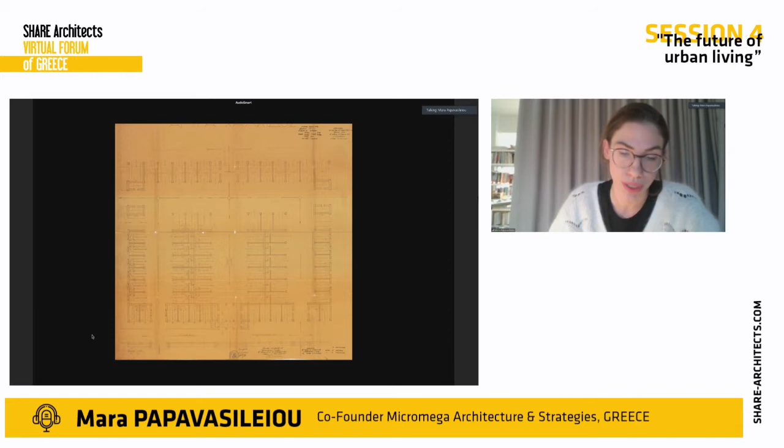But the needs for space grew, so after a large immigration movement towards Greece, there was an architectural competition in the 1930s for the extension of the market. The architects Kidoniatis and Vagianos were awarded the first prize. Their proposal was innovative for the time, following the aesthetics of their era: an extension of the market built in concrete, faithful to the mid-war modern spirit, the Bauhaus spirit, which also incorporated some Art Deco elements. The surrounding cantilevers are 3 meters wide, which was a technical innovation of that time.

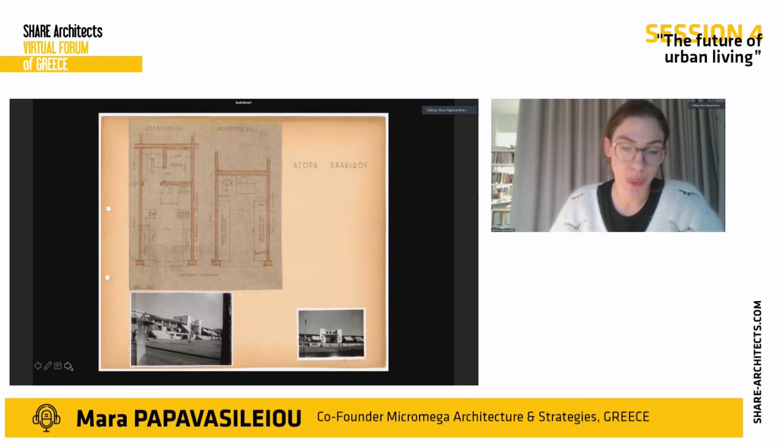The municipal market was the heart of the city and the social life of Chalkida until the 90s, when the buildings started to get abandoned. These are pictures from the 70s, and these are recent pictures.

Hopefully, in 2015, the building is declared a monument by the state, so an architectural competition is announced later that year to save the monument. Our team wins the first prize in this competition.

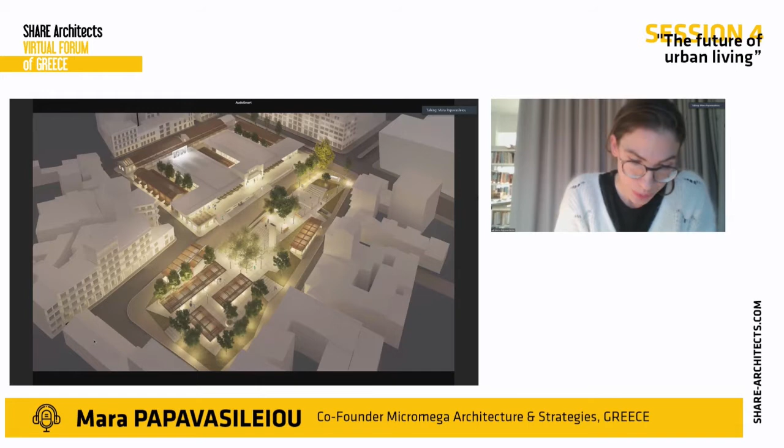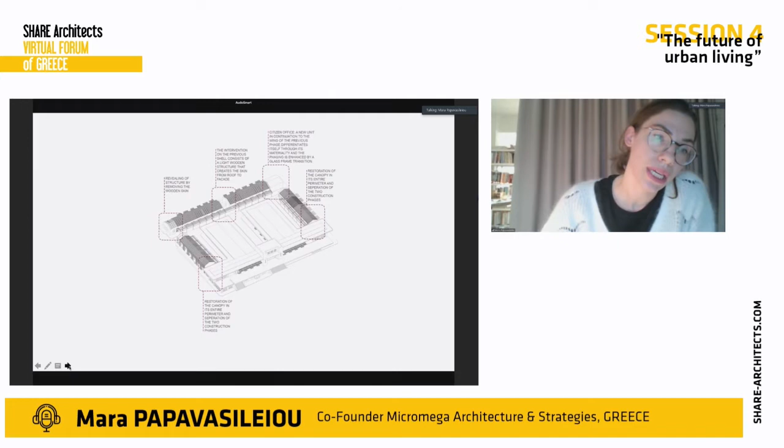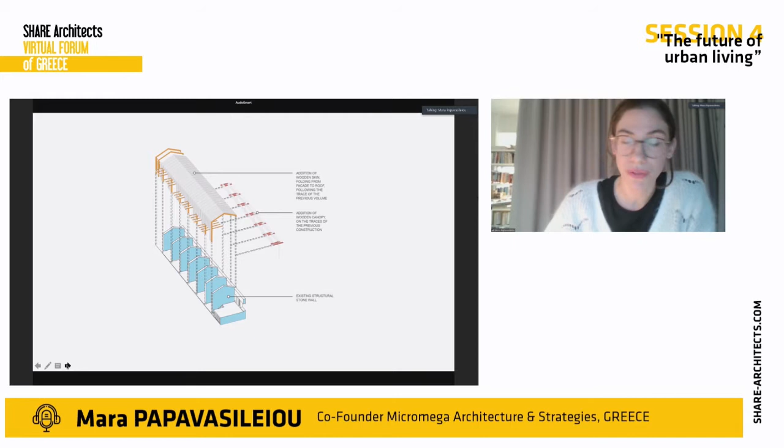The main concern of the design was to create a contemporary architectural layer in harmonious dialogue with the existing building, one that respects the palimpsest of its history and reveals the different phases. We wanted to take the P-shaped neoclassical extension, reveal the Bauhaus modernism, and add a new layer that is lighter and more transparent. So if phases A and B were made out of stone and concrete, more heavy and rather introvert, our new extension is made out of wood, a transparent material that reveals a more iconic and contemporary language.

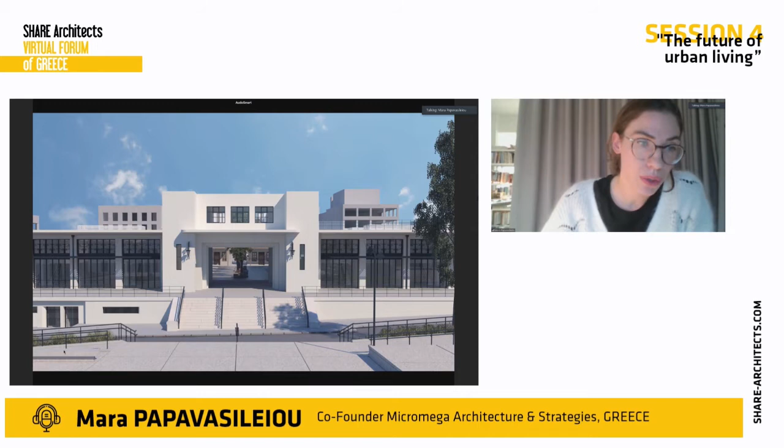The narrow openings of the shops now become a new transparent facade, and the old stone walls are replaced by a more transparent and translucent layer, a filter towards the shop fronts and the new extension.

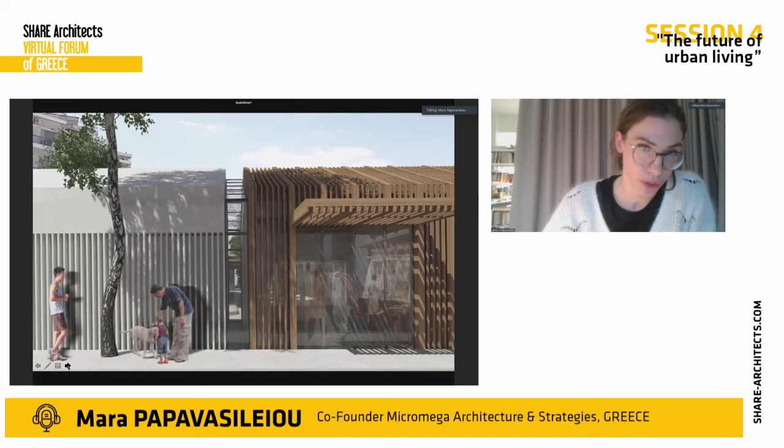This intention has been praised by the jury, so the building is treated as a vibrant piece of the city. What we designed was not only the building, but also the space in between.

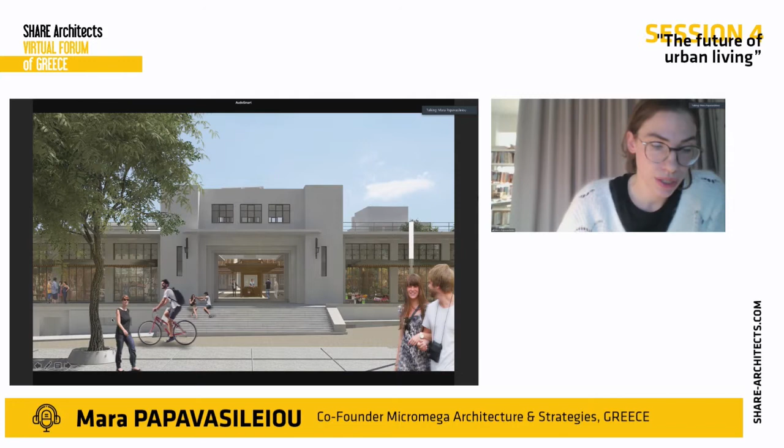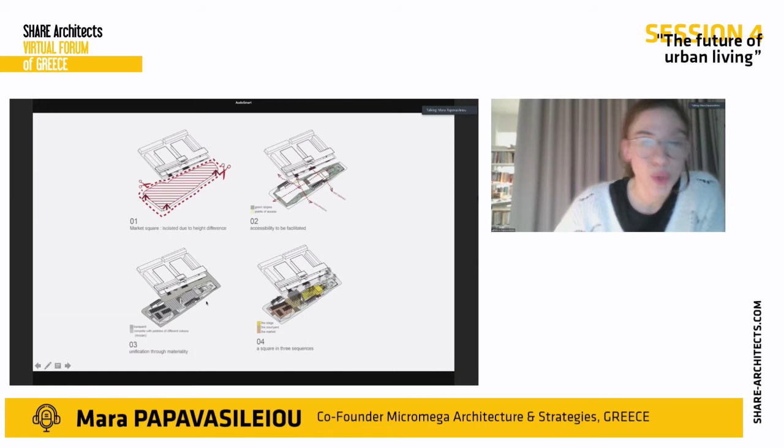The new pergolas offer shadow from the sun and extend the commercial life outdoors. The market also extends its life to the square. The market is linked to the surrounding pedestrian streets, whereas before the square was an urban void. So we tried to make connections, elevate the square, and introduce new programmatic uses that will make the public square a new vibrant piece of the municipal market.

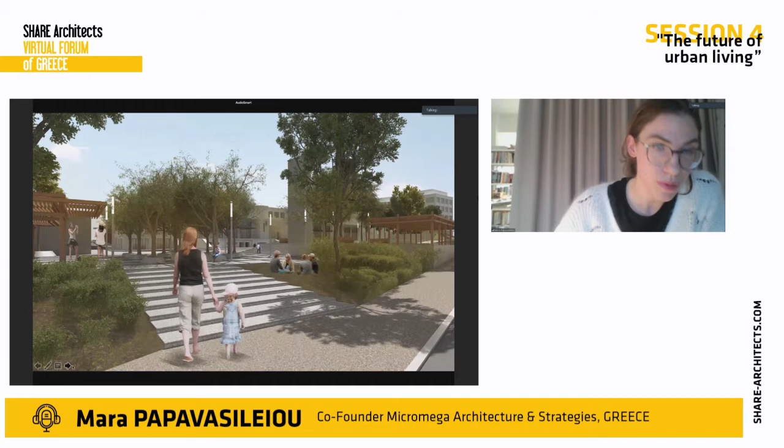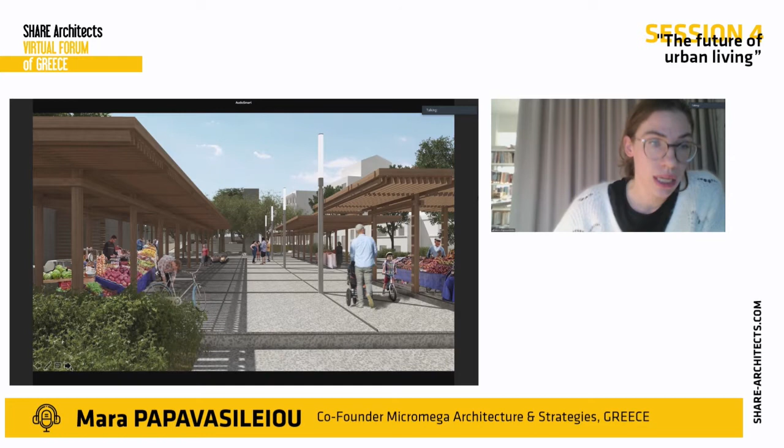We designed an amphitheater for uses where people could gather, have theatrical plays, and children could play. We created an open plaza for the farmers market that would act as an extension of the municipal market, and various green areas that were vital for the city.

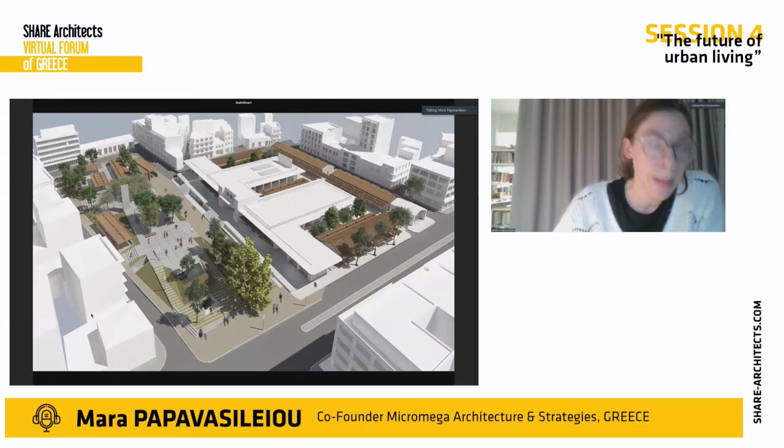This project has been tough to implement. As a listed building, we have passed through a maze of bureaucracy and councils. Still, we have obtained the planning permit, and the municipality is currently looking for the contractor. Hopefully we will be able to speak about it in a few years.

While looking at Google Maps some time ago, I realized that we have this picture of the render of the competition, which is now up there. So we have the Google history layer there.

And I'm going to the next idea that we would like to explore: how the future of urban living can be seen through densification and the creation of open public spaces. We will do so through the example of the winning proposal for the new headquarters of the Greek Public Power Corporation, DEI.

This is the first steam-powered plant of Greece, built in the late 19th century. The plot is adjacent to the river Kifissos, which is now a national highway, and Piraeus Street, one of the main axes linking the center of Athens to the center of Piraeus. It was a very important plant factory at the time, an iconic building, now declared a monument. Obviously, it's out of use.

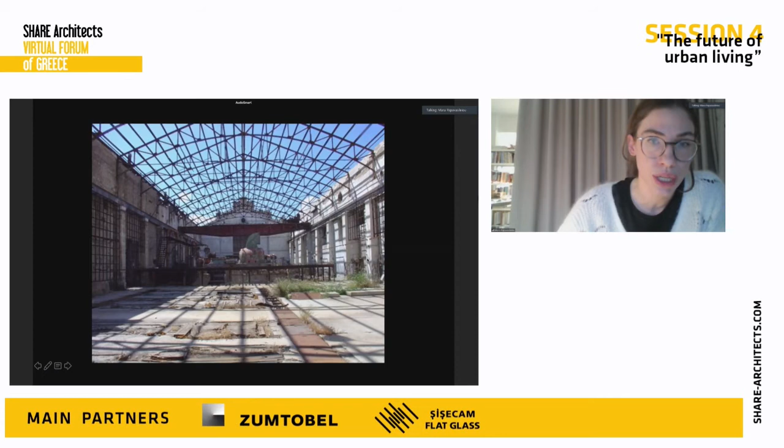It's a major piece of infrastructure. The Public Power Corporation, wanting to gather all its offices, announced a competition that would keep the historic building and extend it to this plot and to the plot on the left and below, which were old warehouses that would be replaced by the new building.

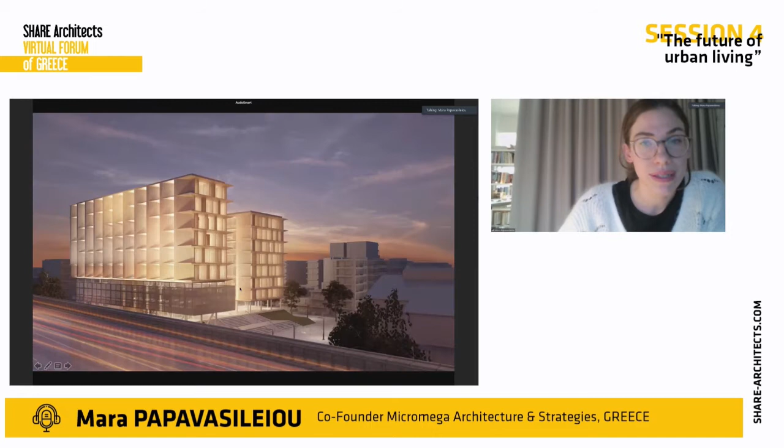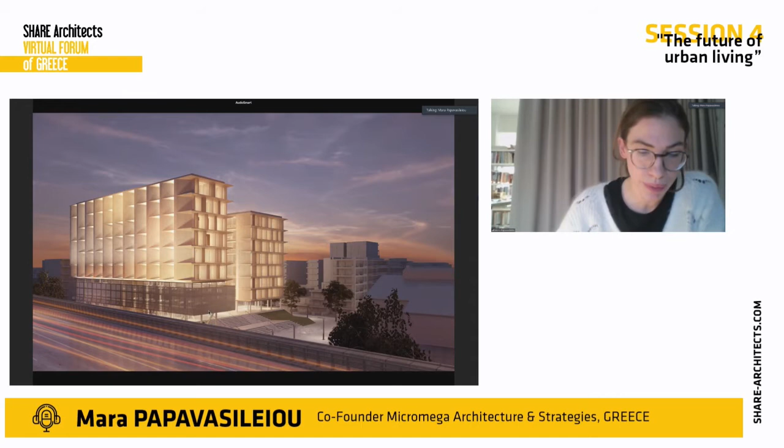Our instinct is to create a landmark. We are in the middle of two major infrastructures where we want to build the new face of the Public Power Corporation. So our first instinctive answer is to densify. We propose a building that rises high and creates an urban landmark, adjacent to major infrastructures, so the icon is very important.

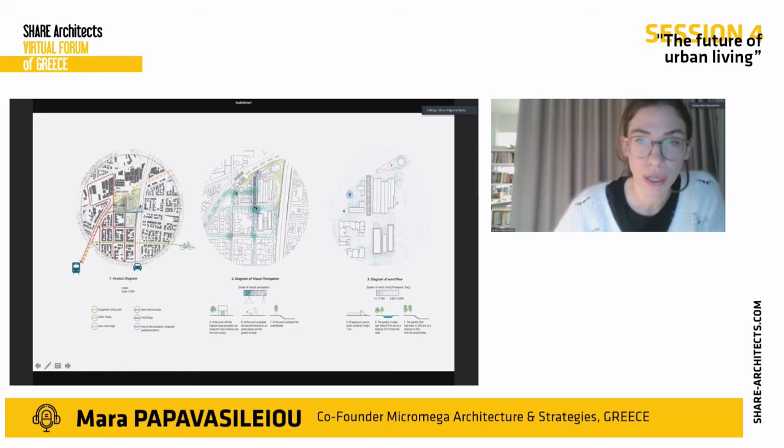We have examined the visual perception of the building in order to see the places where we would enter the plot, as well as the different air streams that would flow around. Our idea was to unify all the plots by creating a solid ground basis. Then the building would rise up and create a second open square.

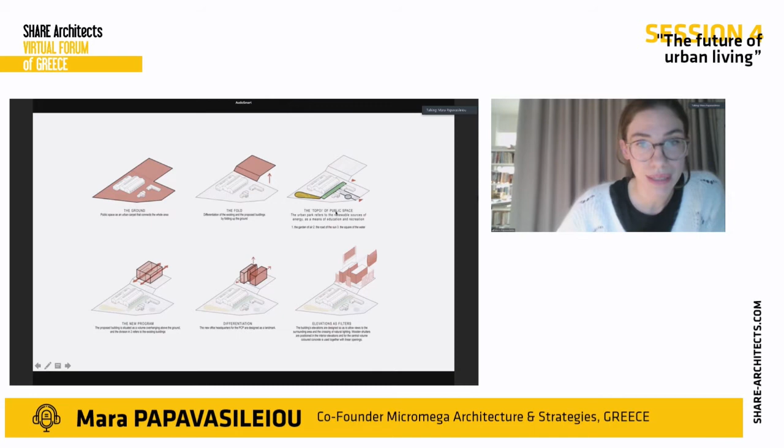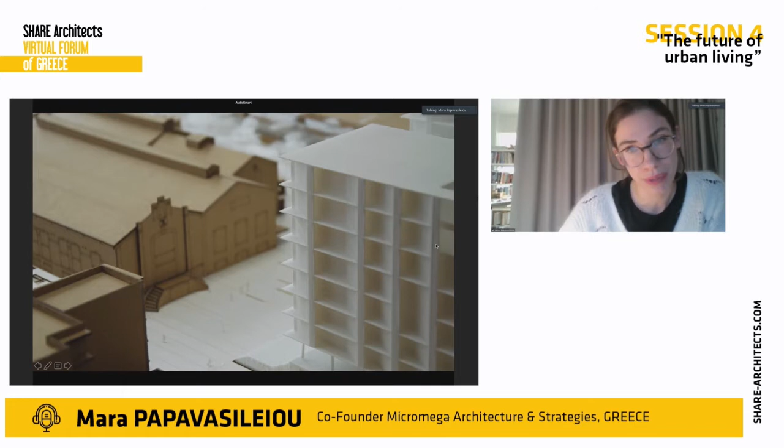The main idea was to create a threefold building that would answer to the existing threefold historical complex, and create an urban park, open and accessible to the area. The idea was to create a dialogue between the old historical complex and the new building, a dialogue that enhances the multiple layers of history of the city.

As image is important, the brand image of this corporation is also important. So the identity of DEI, the main provider and creator of energy in Greece, should get a lift.

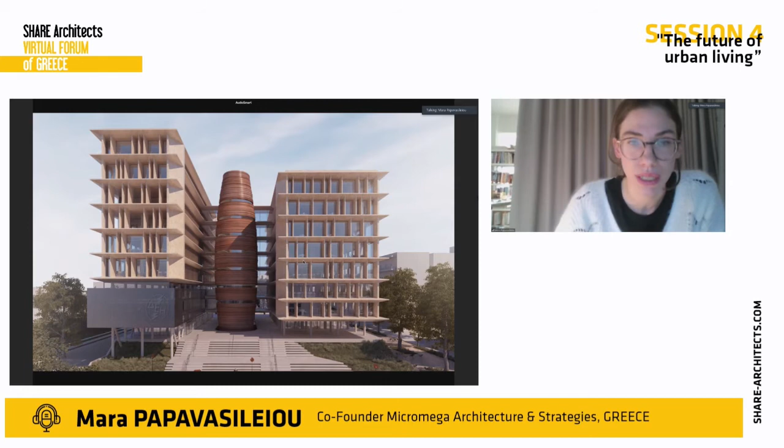The new building acts as a landmark. It has a distinct monumentality in this threefold distinction. The public nature of the space and the building are further explored through the elevated pilotis, which creates an extension of the public space, as well as the differences in materiality that are creating this new identity.

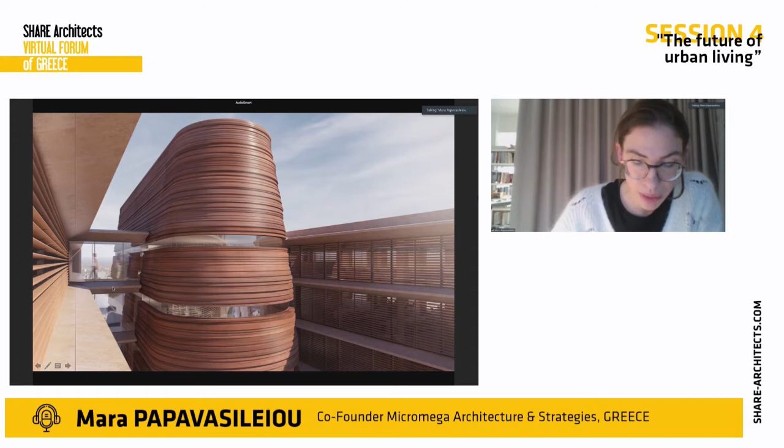The facades are treated by shading filters that control the views and the diffuse sunlight. This is also reflected into the interiors.

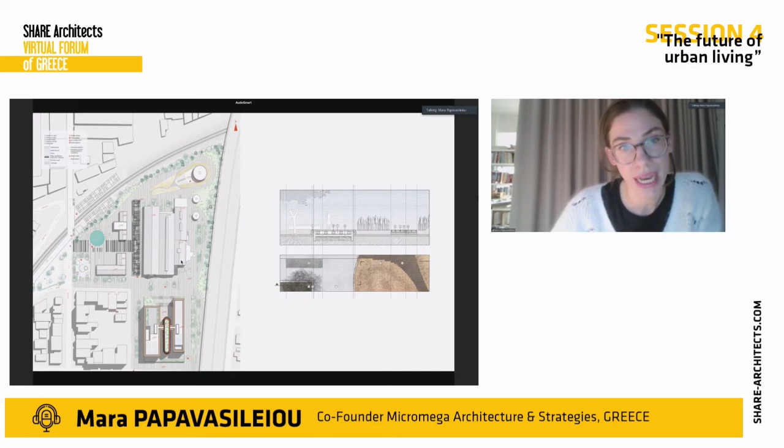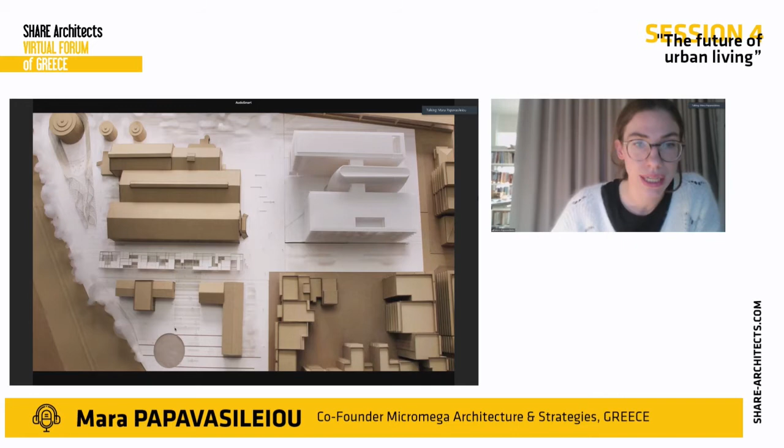So apart from the building that acts as an iconic landmark, we wanted to create an open urban park accessible to everyone, a park that would enhance the character of Athens in the new era. So it will be a park dedicated to sustainable forms of energy. And we do so by declaring three topoi, three places that are dedicated to the water, to the sun, and to the air - the sustainable energy forms.

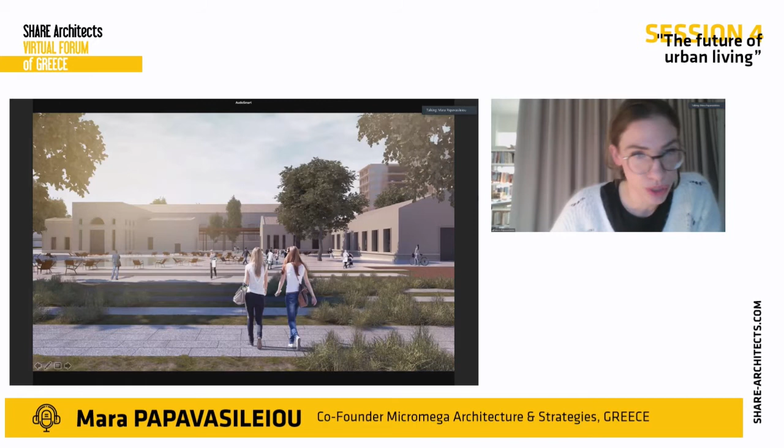The Plaza of Water is a shallow pond that generates a natural cooling effect and acts as the entrance from the railway station. Steel chairs around the water create a space for the users to manipulate for themselves.

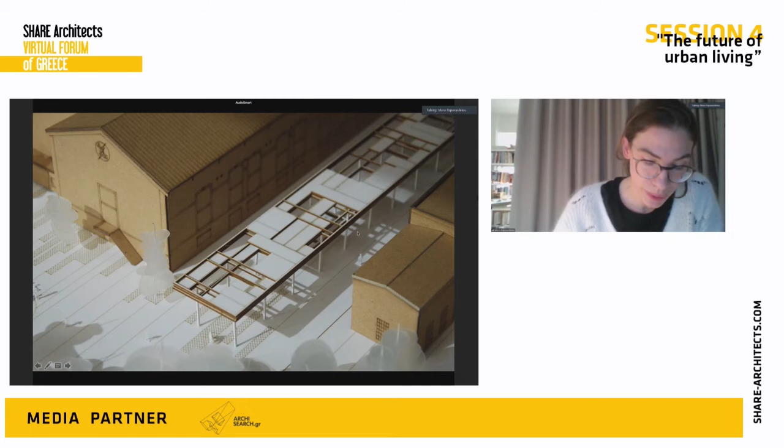Then we have the sun path, the linear canopy that accommodates exhibition, markets, and events, that has solar panels that provide energy for the rest of the park.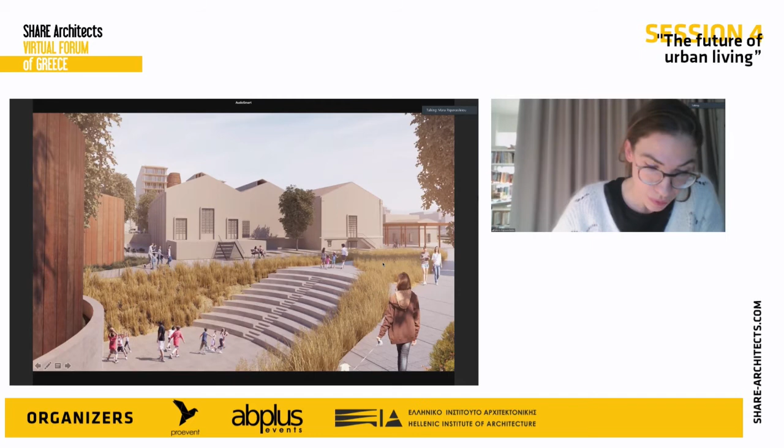While the third space would be a sunken amphitheater dedicated to the air. The air garden can host performances, meetings, and events, and the space is surrounded by plantation that follows the flow of the air.

So, densification of the built and public space - these are the main ideas that we try to introduce through this example.

Moving on to the third case study, we would like to talk about adaptability and synergies. This is a proposal for a competition a long time ago for us, in 2012. The project Shelter for All would reply to the needs of metropolises.

We decided to focus on Istanbul, and more precisely the case of Gecekondu, which is the informal settlements that were built overnight using concrete, timber, and disused material.

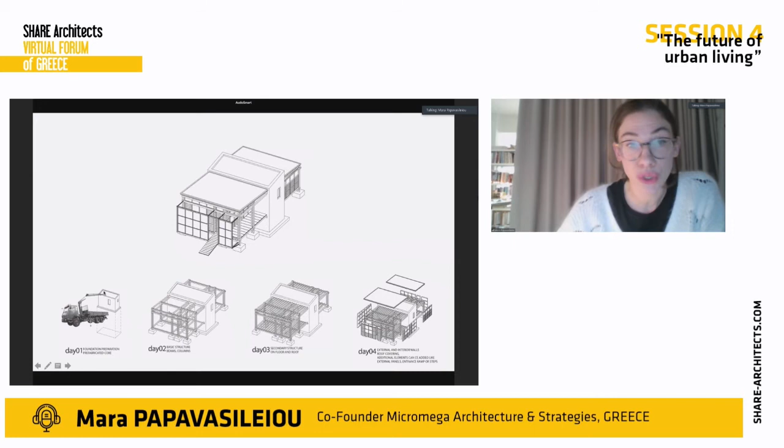Our idea was to provide a methodology that would combine a solid core, a prefabricated concrete core that could be introduced, and then the inhabitants would build around this concrete core by timber the houses for themselves.

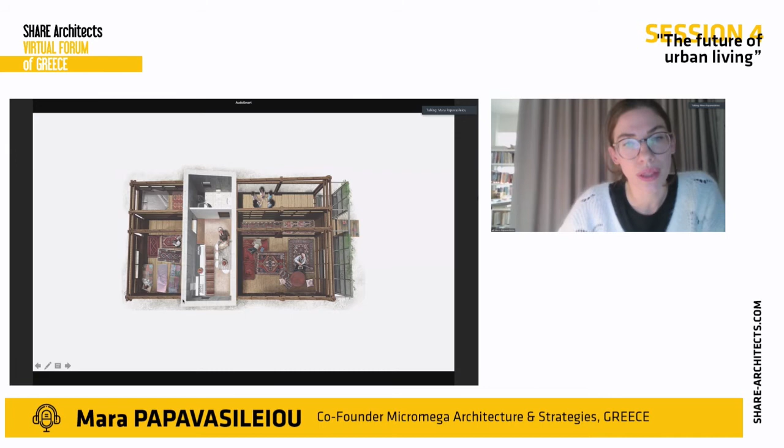So we have a prefabricated box that accommodates the kitchen and the bathroom, so the wet infrastructure that could be supplied by a manufacturer, and around this would evolve the living spaces in a more light and flexible structure that can be built by the inhabitants themselves.

This idea introduces the synergies and the adaptability. What we wanted to show is how we can improve the housing conditions of the cities by supplying them with knowledge. So we're not providing the whole housing, but we provide a tool around which we can evolve, we can build our own house. Synergies create long-lasting bonds and offer methodologies that can be reused in other situations. So through synergies and adaptability, it's a way of empowering local populations.

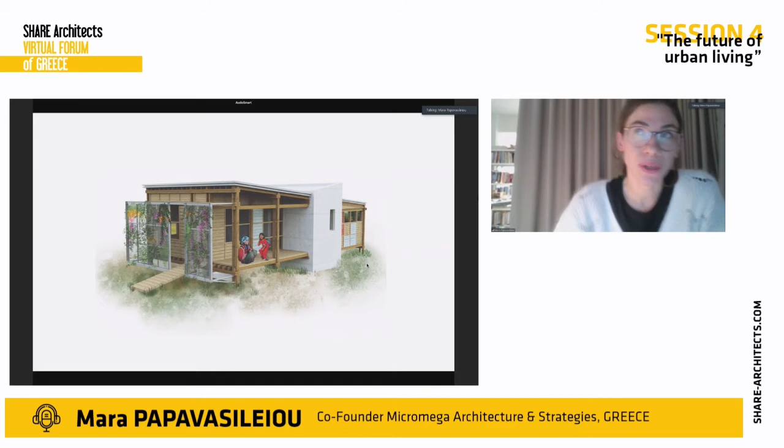The last case study that we would like to explore is mainly focused on the urban block and the programmatic mixity - how we can redesign in a holistic way the urban blocks in order to provide this generic urban module with social interaction and a public space character.

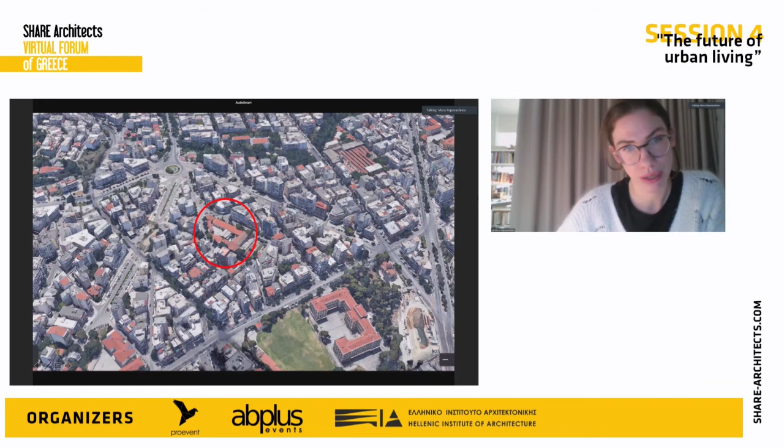So the plot would host 9 different uses: the kindergarten, the daycare, municipal sports hall, a multi-purpose hall, a medicine office, and exhibition space. Our idea was to use the urban block in order to propose a porosity, an open space that hosts social interactions and offers this programmatic density.

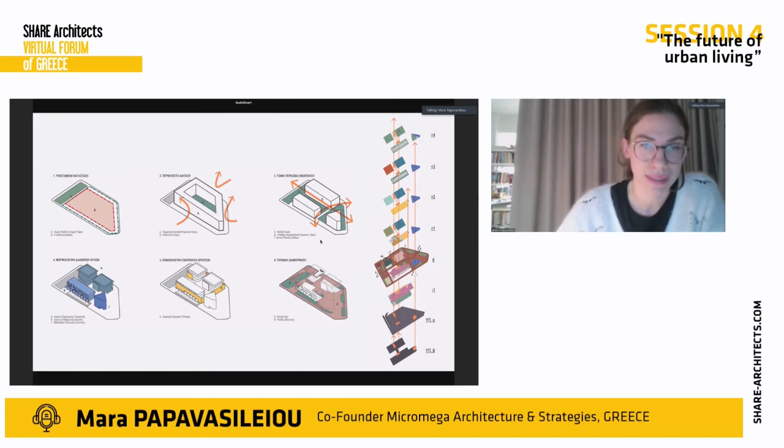One of our main ideas was how to take one use and reply to needs. So for us, the public library is an important use that is actually lacking in Greek cities. So the library would act as a community condenser.

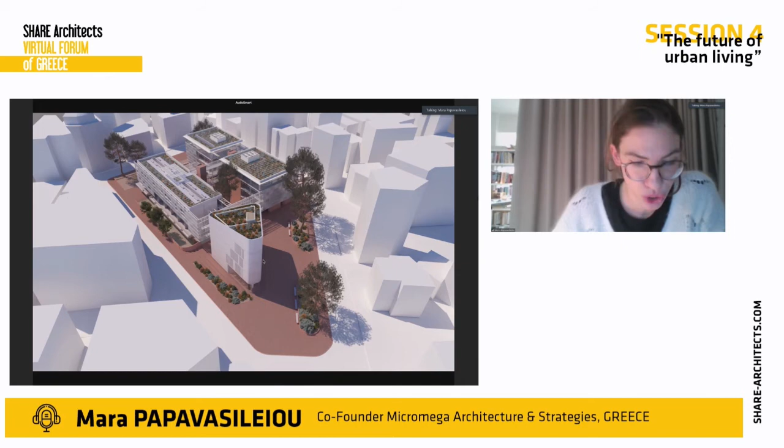The proposal introduces a new meaning to the building complex by separating out this use of library. In our digital age, it has been proven that the role of libraries in local communities is very strong because it ensures not only social integration, but also lifelong learning.

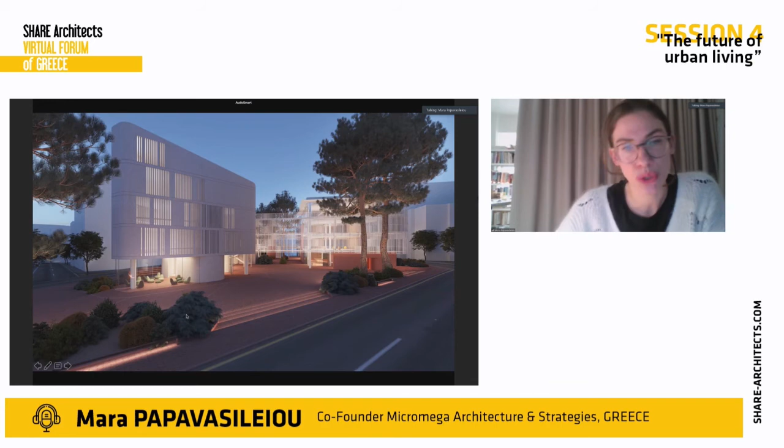So the library is designed as a building in its own right. It is the main facade of the square, and it has a direct connection to the community. One of the main ideas was to introduce this use in parallel to the porosity of the urban block. The urban block is divided - it has a passage through it, creating a new passage through the city.

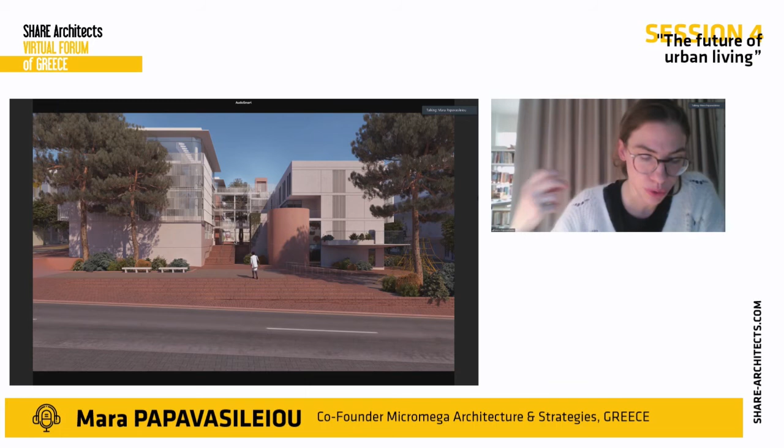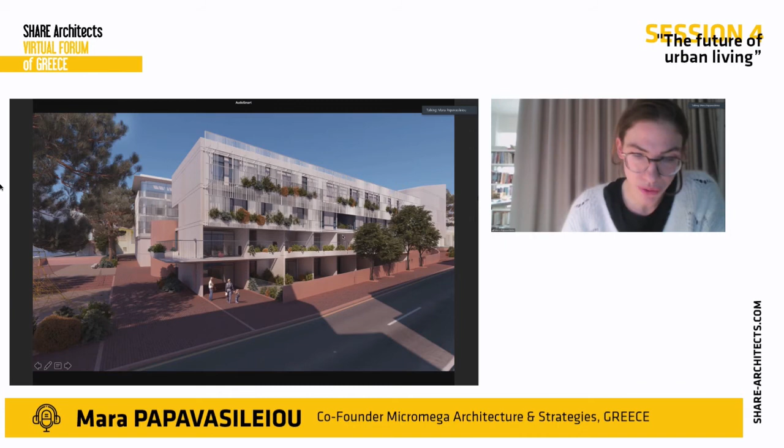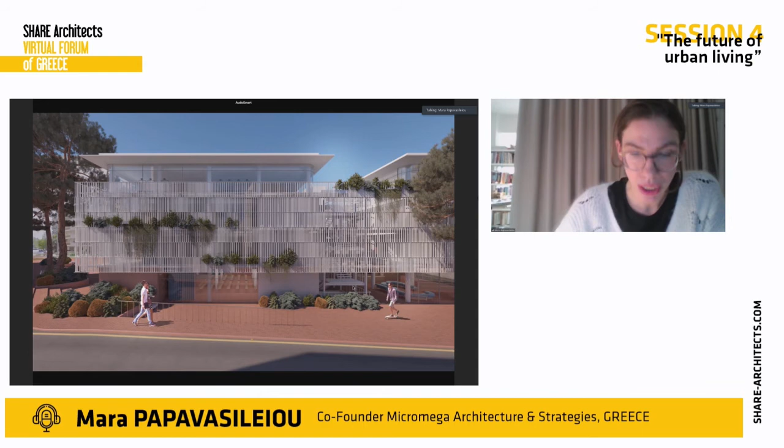What we also wanted to introduce was this continuation through the double skin. This double porous skin made of ceramic tubes is introduced in order to filter the views, offer shadow and vertical plantation, and create this unifying character around the whole. The heart of the complex acts as a secondary courtyard.

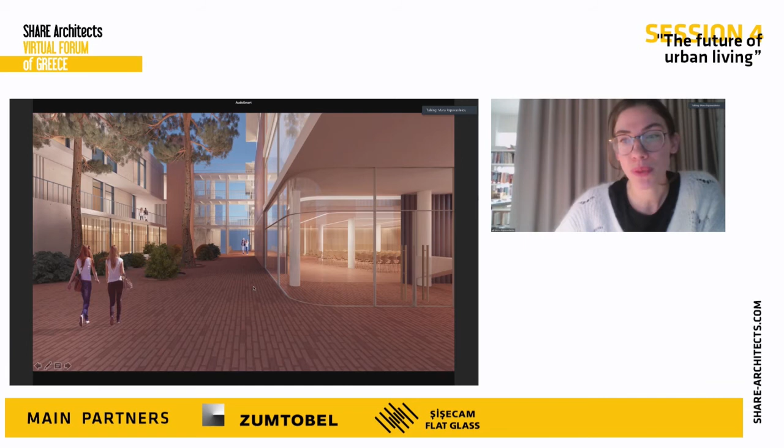And what we also wanted to introduce was the programmatic mixity that could also be a 24-hour programmatic importance. So how we introduce into our cities uses that create vibrant public spaces through the day.

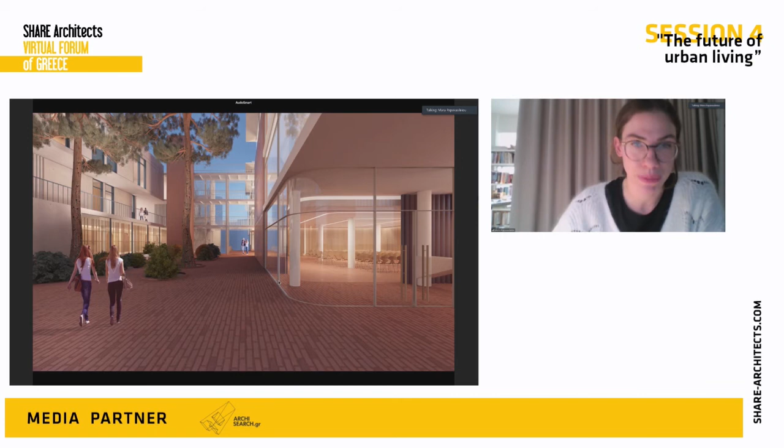And I would like to sum up in this point. Every project where we participate is for us an opportunity to put forward ideas about urban life and test them, research and create questions. For us, questions are the most important stage when we design, in a competition or in a private commission. Architecture is a holistic project that combines strategies, and it takes time. For us, one of the things that we have understood is that architecture takes long to be designed, takes long to get all stakeholders to agree. It takes even longer to get planning permits sometimes, and long enough to get built.

So I would like to finish by what we believe. What we believe is that every project is mainly a process in time. So for us, the future is mainly a present tense. Thank you.

Thank you very much, Ms. Papavasileiou, for this very well-organized lecture, very thorough, both in terms of its concepts and the way you showed us the buildings and the way they relate to them. I think it was well related to the whole event today. You talked about the city through the projects as palimpsest. You talked about the urban block, public spaces, adaptability, and your last sentence about the future and the present, I think we should keep.